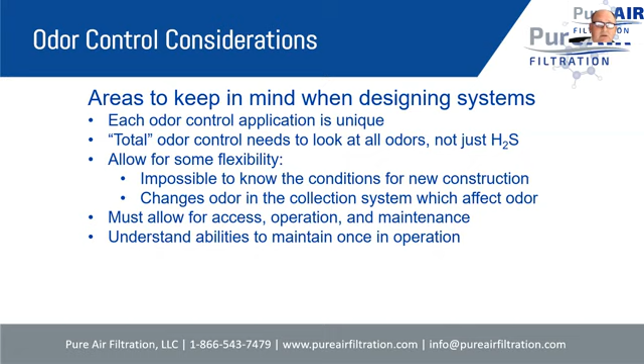So let's talk about the different types of odors. There's fresh sewage odor, basically referred to as fecal odor - that's sewage that's come just from the houses, and so it hasn't developed a whole lot of hydrogen sulfide. Of course there is hydrogen sulfide, which is the primary focus of the odor control industry. Without a doubt, 99% of what we're removing in most of our applications, we are focused on hydrogen sulfide.

Where there is wastewater odor, there is most likely hydrogen sulfide. So it's important, but also keep in mind mercaptans and other reduced sulfur compounds, ammonia and amines, and even volatile organic compounds can be a case as well. These reduced sulfur compounds can really be nasty odors at very, very low levels. We'll talk about that a little bit more, but it's important to make sure that you're addressing those as well.

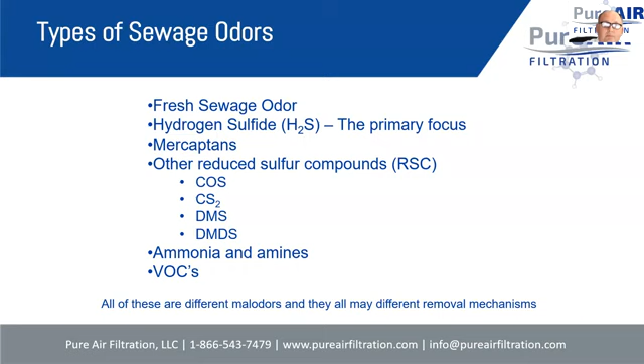If you're not familiar with a lot of odors, here is some description. This is some information that's commonly found on the internet about various types of odors.

I think everybody is generally familiar with hydrogen sulphide, kind of a rotten egg smell. The key is to look at the odor threshold for hydrogen sulphide. In this particular citing, it mentions 3 parts per billion as far as at what level you can smell it. That's a pretty low level, and that's why hydrogen sulphide gets focused on so much, because you can smell it very low.

But mercaptans are measured in the parts per trillion level. We've got plenty of others in the parts per billion and parts per trillion level. But if you take a look at ammonia, we're typically only smelling it in the parts per million level.

We get a lot of inquiries where people are looking to take odor out of a wastewater application, and they're concerned about hydrogen sulfide and ammonia. Generally, we don't see ammonia creating many odor issues, because you just don't smell it at fairly low levels. So you really have to understand what's the beast that you're working with and trying to tame that beast. Certainly some of these other odors are much harder to tame than others.

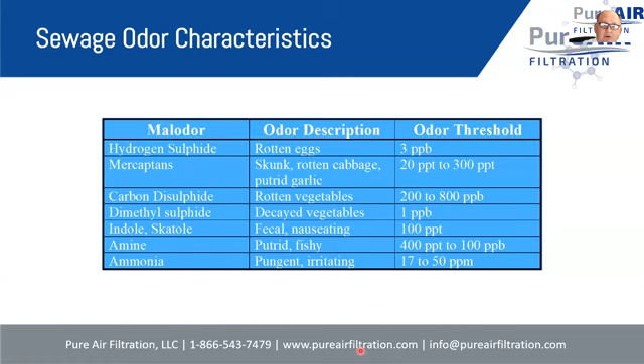So how do you go about figuring out what odors you have in your system? Let's say you're working on an existing application, you've got an odor problem, and you need to define what that problem is. There are some very good tools on the market readily available for you to work with. Many of these can be rented or purchased, and we'll discuss a couple of them.

Probably one of the biggest tools in the industry is the Odalog or Accrulog. The Odalog has been out for a number of years, certainly more than 15 years, and has been a standard in the industry for collecting hydrogen sulfide data. A very nice tool, but unfortunately it's gotten a little out of date as far as its capabilities. Along comes the Accrulog as a competitor, offering a really nice interface, Bluetooth connection, and even a cellular connection so you can check on your data remotely.

Very nice device. You can easily find these on the internet. They're distributed in the US by Detection Instruments, really good people, certainly would recommend. Both of these devices are distributed by Detection Instruments, but I definitely recommend looking at the Accrulog. It's a very nice product.

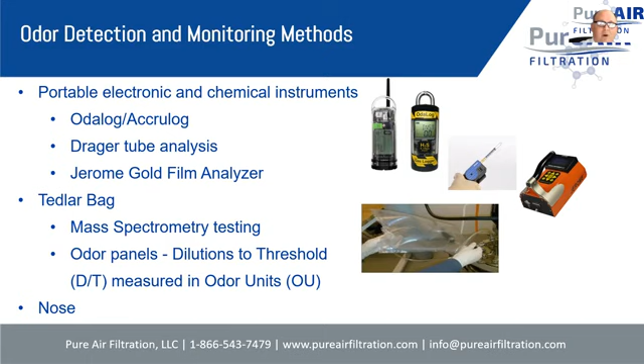So in summary, there are lots of different types of malodors, bad smelling odors, and the level and mix is constantly changing. So when you're selecting a system, you have to keep in mind that these malodors are detected at extremely low levels, in the ppb or parts per trillion levels. And different odors may need different types of treatment. Not every odor is the same, and you need to consider that when taking a look at the odors.

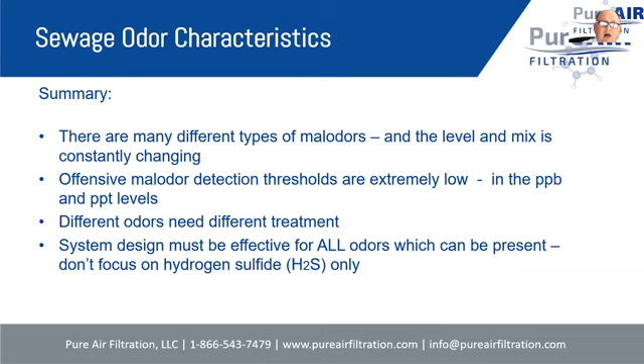And typically we recommend that you design your system to be effective at all odors which are present. Don't just focus on hydrogen sulfide. We've seen lots of cases where, as I mentioned before, hydrogen sulfide is the focus, and the system does a great job of removing hydrogen sulfide, but it leaves behind a lot of other odors which people are unhappy about.

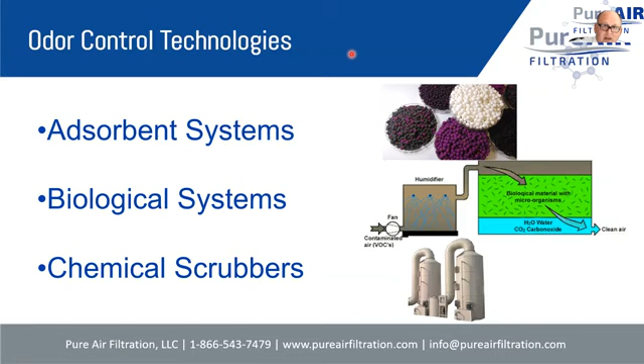So today we're going to take a look at odor control technologies. In general, we are going to focus on just 3 technologies. These are kind of 3 standard technologies used in the odor control market, especially wastewater odor control. So the first is adsorbent systems. The second is biological systems. And we're going to spend a short amount of time on chemical scrubbers. I'll be very frank with you, I am no expert on chemical scrubbers, so I don't offer a whole lot of expertise in that area, but there's a little bit of information in here that I can assist with.

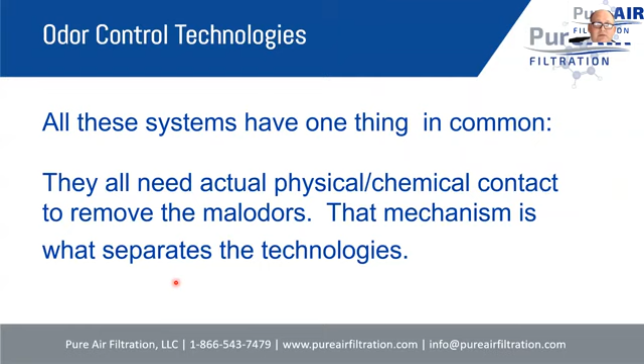So taking a look at those 3 technologies, what do they have in common? They have one thing in common: they all need some type of physical or chemical contact to remove the malodors. It's just the mechanism, the difference in mechanism that separates the technology. So they have to have some contact with the odor in order to remove it, to reduce it, to react with it, to eat it. Being able to understand the amount of contact and the type of contact that has to happen is very important when taking a look at these odor issues.

When you're taking a look at systems selection, the type of technology you're going to use, you definitely want to be interested in the efficiency of removal, the reliability of the system, initial cost, operating cost, footprint space, ancillary buildings if you need storage of chemicals. A big issue is maintenance and operational concerns, understanding the willingness of your client, how much time they're willing to spend with the system.

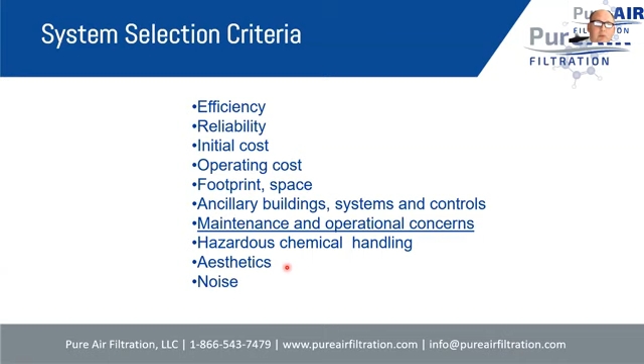Hazardous chemical handling is very important these days. Some of these systems can use very hazardous chemicals, so you want to make sure whether a client is ultra concerned about that. And of course, aesthetics and noise are big issues in the industry as well. There's no sense in fixing an odor problem and creating a noise problem for neighbors.

Here's a selection chart I've come across in taking a look at various odor control systems. This doesn't mention chemical scrubbing, and I'll probably work on adding some information about that. But this is a selection chart you can generally use based on hydrogen sulphide levels versus airflow. As your airflow goes up, various technologies become more significant, or as your H2S level or odor level in general goes up, other technologies tend to take over. In some cases, a hybrid technology might be used where two technologies together provide a solution.

We'll be able to send this presentation to you afterwards in case you want to reference this particular one. And when we update it to include chemical scrubbing, we'll send that to you as well.

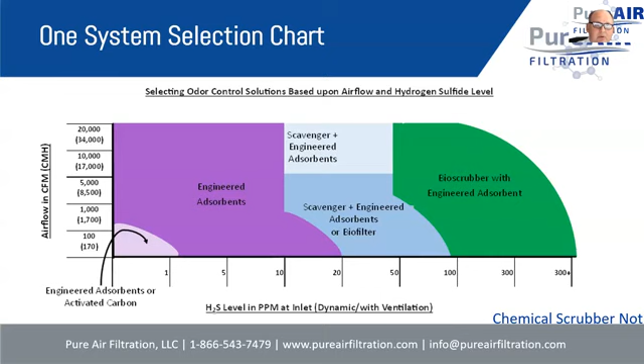So the first type of technology we're going to take a look at is adsorbent technologies. Very often this is referred to as activated carbon technology, and that's the basis behind the technology, but there are a lot of other adsorbents available on the market these days that go beyond activated carbon. So let's just take a look at activated carbon.

For activated carbon, sometimes people refer to it as charcoal - it's charcoal with an additional activation step. Generally, activated carbon has been used for a long time for capturing odor and purifying air. It's a good general odor capture, capturing lots of different types of odors. In general, it has a low capacity for inorganic odors, but it's great for organic odors - volatile organics it's really great at. But for inorganic odors without a carbon molecule, it doesn't do very well.

Keep in mind, activated carbon is made of carbon molecules, and carbon is attracted to carbon, so inorganic molecules that don't have carbon typically don't have a great affinity for activated carbon. Also keep in mind that activated carbon holding odor is actually a physical process. These odors go into activated carbon and are held inside, but they can actually be desorbed - so you can have odor come out of activated carbon. You need to be aware of that, be careful, especially when the activated carbon is near the end of its life, fully consumed, as it tends to let some of that odor out occasionally.

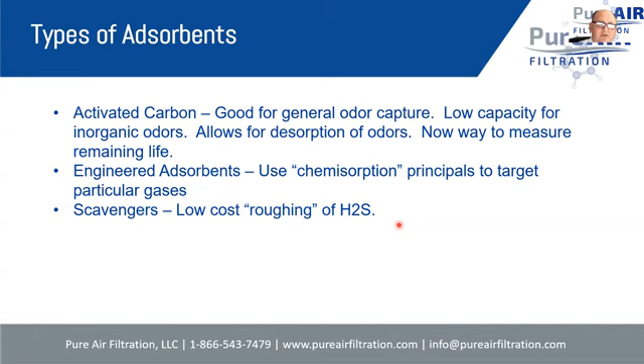Over time, engineered adsorbents have been developed. These are typically using a chemisorption principle to target particular gases - we're going to talk about chemisorption coming up. Engineered adsorbents basically take activated carbon and other substrates and beef them up, getting additional performance out of them. We'll also talk briefly about scavengers, which are low-cost roughing products focusing primarily on hydrogen sulphide. We'll look at an example of that as well.

The technology for adsorption is also referred to as gas phase adsorption. So how does gas phase adsorption work? These adsorbents, activated carbon being one of them, have a huge number of microscopic pores inside of them, typically just a little bit larger than the molecules being adsorbed. These odorous molecules find their way into the pores of an adsorbent and are trapped inside. In activated carbon specifically, there's a weak molecular attraction that holds those molecules in the adsorbent - it's kind of a magnetic principle.

If you think about it that way, it's a van der Waals effect, which is the technical term. Basically, molecules stick to molecules, and in this case odorous molecules go into the activated carbon and they stay in there in most cases. Sometimes they desorb. So that's generally how gas phase adsorption works.

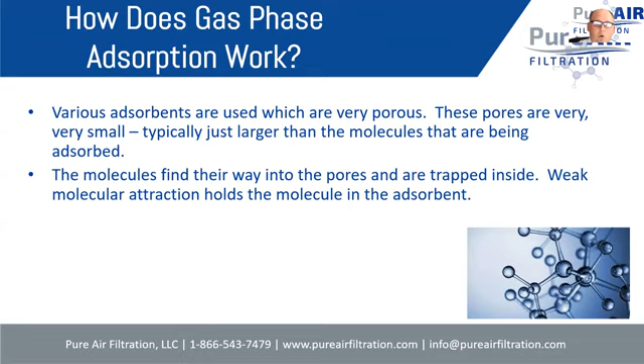Let's talk about the difference between adsorption and chemisorption. Adsorption is spelled with a D, and there's a difference between absorption and adsorption. Adsorption with a D is when something goes into an adsorbent and is captured on the inside.

It's very much a principle like a sponge. If you think of an adsorbent to be like a sponge, activated carbon is like a sponge for gases. If gases go into activated carbon, it's just like water going into a sponge. It's bound onto the inside and carried throughout that entire sponge. But like a sponge, if you squeeze it, the water comes back out. The same thing can happen with activated carbons.

Under the right conditions of stress, typically a change in temperature, pressure, or humidity, those gases can come back out. So that's the adsorption and desorption principle with plain activated carbon.

A subset of adsorption is referred to as chemisorption. Chemisorption is when the adsorption principle is used, but a chemical is added to the adsorbent. The gases go into the adsorbent, and then there's a chemical reaction that occurs while it's in there, and the gas is converted into a solid and held on the inside permanently. It would almost be like a sponge, but a sponge where you'd have a chemical reaction and the water couldn't come back out. That's the principle of chemisorption.

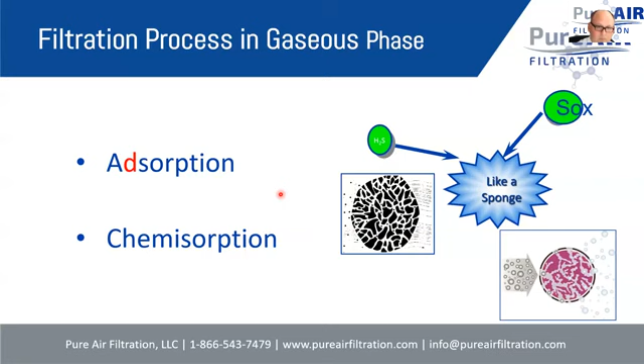So just to give you an idea about these pores I've been speaking about, here is a micro view of activated carbon. You can see under an electron microscope what these pores look like. These typically were originally the cell walls of some plant in prehistoric times, before it was turned into activated carbon, whether it comes from coal or whatever the substrate was ahead of time. Gases go into these pores and bind to the sides of them.

Now, the incredible story about activated carbon and why it works so well is that one gram of activated carbon has about 1,100 square meters of surface area. If you counted up the area of every one of these pores in one gram of activated carbon, you get about 1,100 square meters, about the size of a football field. So if you spread out activated carbon, you could spread it across a football field. It's an incredible amount of porosity, and we use that porosity as an advantage when working with adsorbents.

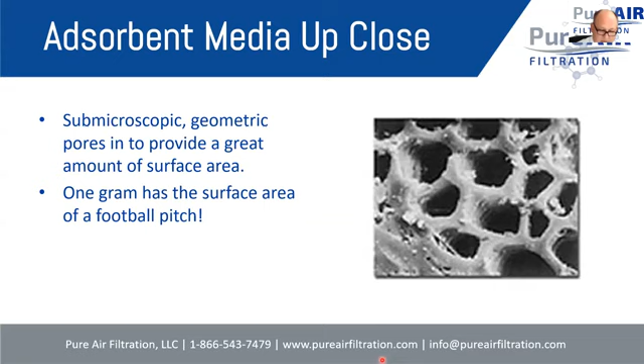So again, adsorption is a physical process. With activated carbon, it's typically reversible. Chemisorption is adsorption plus a chemical reaction, and typically you're working with impregnated carbons, catalytic carbons, or some other type of physical and chemical reaction.

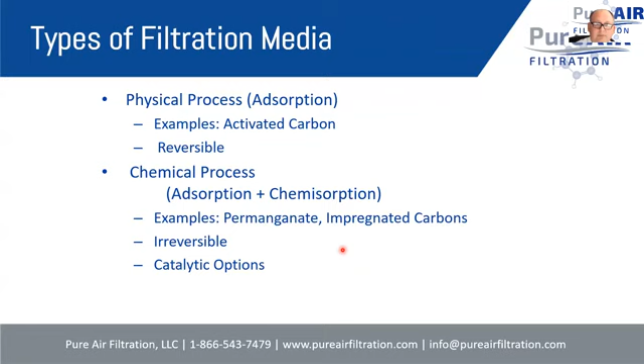Just some quick information on activated carbons. Keep in mind, activated carbon is carbon, and it can come in lots of different forms. You can have coal-based carbon, coconut shell carbon, nut shell carbon—lots and lots of different sources for the charcoal, which is the basis of activated carbon.

The key is that different types of activated carbon have different pore sizes, and different pore sizes are better or worse for capturing different molecules of different sizes. Very often in our industry, people focus on coconut shell activated carbon. There is a misnomer about it—it is one of the best activated carbons as far as capacity goes, but mainly for capture of volatile organic compounds. It really doesn't have any better capacity for inorganics such as hydrogen sulfide, but there's a misconception in our industry that coconut shell based activated carbon is the best activated carbon.

It is the best activated carbon, but only if you've got a VOC, a volatile organic compound, application. In general, just about all other plain activated carbons have about the same capacity as coconut shell activated carbon.

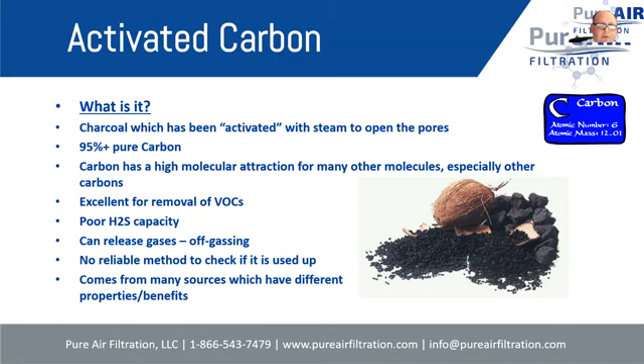Large molecules get caught in large spaces. Small molecules can feed down into these channels and get caught in small spaces. So that's why certain activated carbons work better for certain gases than others. An activated carbon with a high amount of microporosity is very good at capturing very small molecules, while one with larger porosity is better at capturing large molecules. That's the difference between activated carbons.

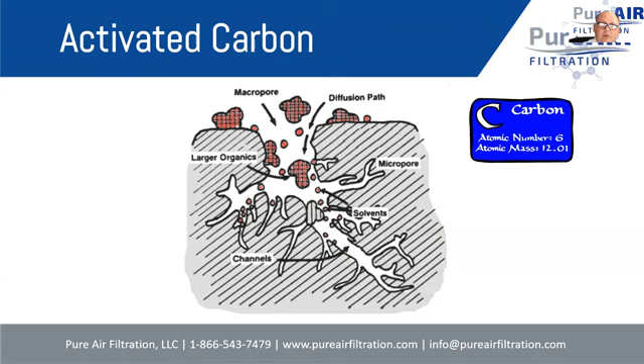We often get questions about carbon regeneration. If you're using activated carbon, and we do use some in certain applications, can that activated carbon be regenerated? The answer is yes, it can be. There are actually two types of regeneration of activated carbon which are possible. We'll address those briefly.

The first is kiln desorption regeneration. I mentioned that activated carbon has the ability to desorb the gases it's caught. If you take activated carbon and return it typically to an activated carbon manufacturer or a specialty regeneration site, they will run it through an oven that heats the carbon so much that all or most of the gases it collected will leave the carbon. Typically those gases are then burned in the furnace, and the activated carbon can be put back into use.

The difficulty is you have to actually remove the activated carbon, send it off to a site, have it regenerated, and then return it back to the site and refill it into the system. Generally, a lot of customers don't find that practical, and instead just dispose of the activated carbon and buy new activated carbon.

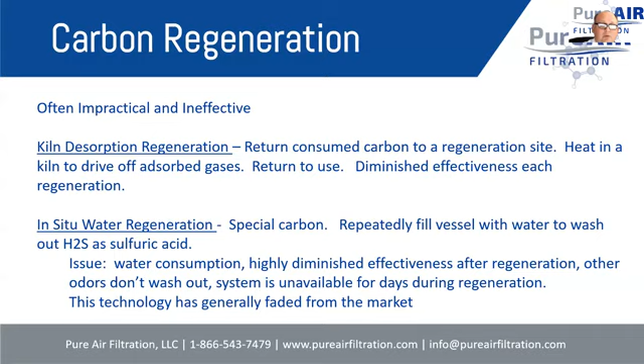So we'll talk about chemisorption. Now, chemisorption, as I mentioned before, is adsorption plus a chemical reaction. This is basically a process that is instantaneous and irreversible. These gases go into an adsorbent, go through a chemical reaction, and are converted to another molecule, typically a solid, where they're held permanently. So generally, after that reaction, the product is non-hazardous because you've taken a product like hydrogen sulphide and neutralized it, and it's typically pH neutral at that point.

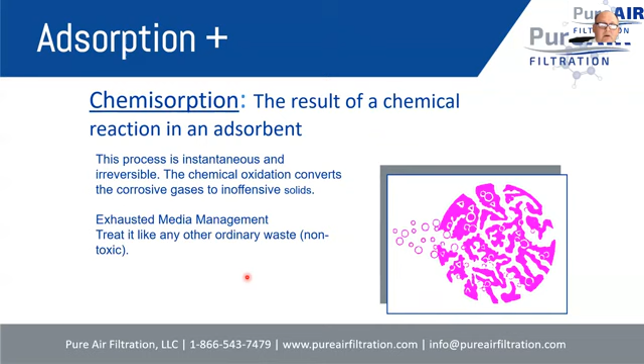Zeolites, natural zeolites, are just a very low cost porous product. There are a bunch of different types of zeolites, but most of the zeolite used is kind of a low porosity product for not very critical applications, typically maybe a commercial application for indoor air quality. And then there are some porous clays which are used as well, especially when it comes to scavengers.

So this is your substrate, your porous substrate, and then the chemicals that are added to do that chemical reaction, or the chemisorption reaction. There are various caustics. A very popular one is potassium hydroxide or sodium hydroxide - they're basically the same. That used to be a very, very popular product, but its popularity has diminished greatly because of an increased possibility of fire with the activated carbon.

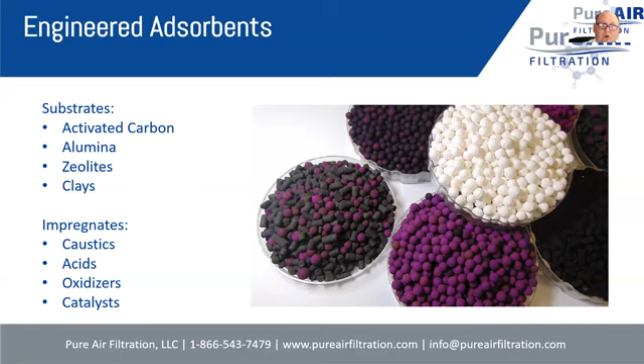We get a lot of questions from customers - well, if it's catalytic, why doesn't it work forever? We know that catalysts are not consumed during a reaction, so why don't these catalyst adsorbents have an infinite life? The reason is those pores fill up with the hydrogen sulfide, and eventually the hydrogen sulfide can't get into the activated carbon because the pores are so filled up with the sulfur, which is the end product. That's what diminishes the performance and the capacity. Once the activated carbon is full of sulfur, it can be disposed of.

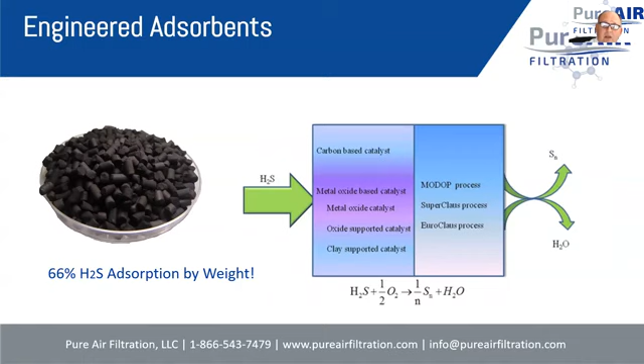The good thing about it is sulfur is non-hazardous. So typically the sulfur that's captured in the activated carbon can be disposed of without any concern for hazards.

I mentioned to you before, permanganate impregnated alumina, sometimes referred to as PIA. The material composition is activated alumina, impregnated with a permanganate, typically potassium permanganate. There are various concentrations offered in the market.

How does it work? It's a chemisorption, like I mentioned. It uses oxidation. The nice thing about this product is it's completely non-combustible. The alumina that is the basis of it is basically a ceramic. You could put a torch onto it and it might glow orange, but it's not going to catch on fire. So it's completely non-combustible, which is very nice for some applications.

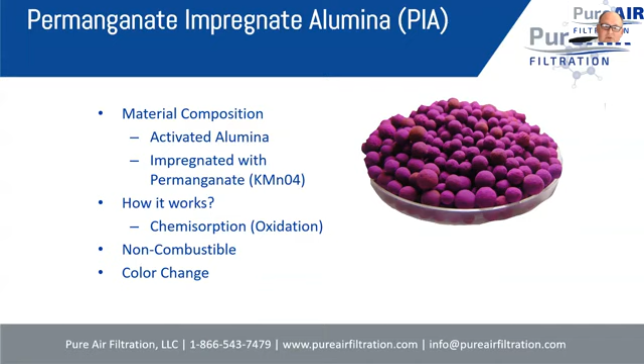And there's a color change that occurs. You can see a little bit of a color change here with some of the pellets, and that's simply due to being exposed to contaminants in the air, like sulfur dioxide or exhaust or anything to that extent. The product starts off with a nice purple color and eventually turns to a brownish color later on. So the color change is a nice ability.

The interesting part of this product is that by adding the alumina product to it, it is fire resistant, and it typically carries a UL fire rating, which is very important for a lot of cases. Certainly fire is something that needs to be avoided. There's also a low chance of off-gassing because you've got the chemisorbent involved, and you still get the color indicator. Even though the carbon doesn't have a color indicator, the permanganate media still has that color indicator.

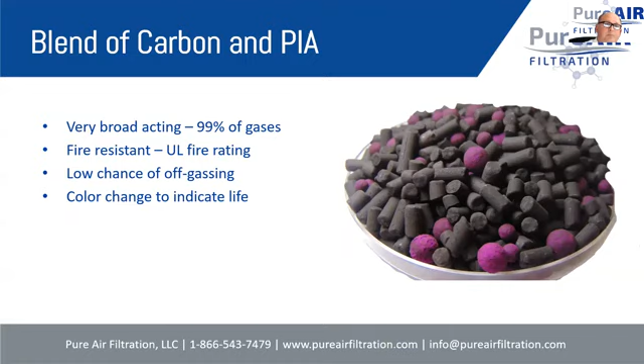That iron oxide has a high capacity for capturing specific gases, especially hydrogen sulphide. So this iron oxide will react with hydrogen sulphide. It's kind of a sacrificial product, we might say. You could use this to reduce high levels of hydrogen sulphide to lower levels. You'll very often see a product like this in an application where maybe you're starting off with 100 parts per million. You'll use this product because it's low in cost to reduce that odor level or hydrogen sulphide level from 100 down to 10, and then reduce the 10 down to 0 using some other type of adsorbent, which is more efficient than a scavenger like this.

So this is a very interesting product. The real attraction for this is that it's far lower in cost than, say, the catalytic activated carbons, while having a similar capacity. It's very attractive for applications where you've got higher levels of hydrogen sulphide. This would get changed out more often, but it's a lower cost product. So from the overall cost standpoint, it works well for high H2S applications.

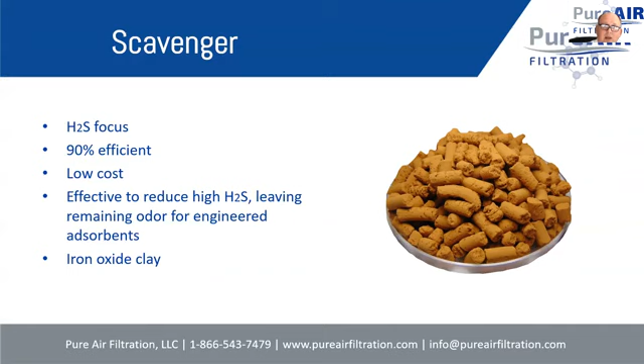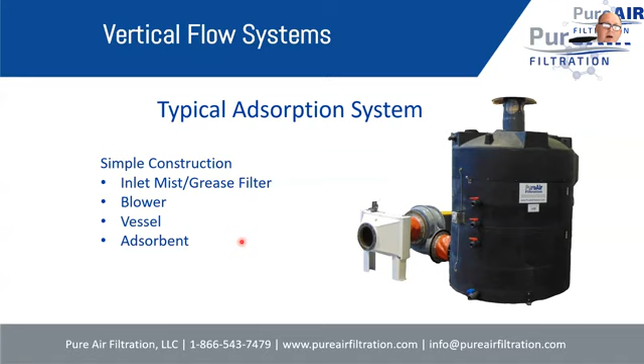This is typically what an adsorption system might look like. You're going to have a mist filter to make sure that none of the mist and grease and such enter into the adsorbent, a fan which is propelling the air through the adsorbent system, and then a vessel, kind of just a standard tank, which has an elevated bed inside of it. The adsorbents are filled on top, and the air basically percolates up through the adsorbent media and comes out the exhaust here. So very, very simple - inlet filter, blower, vessel, adsorbent - very low in maintenance.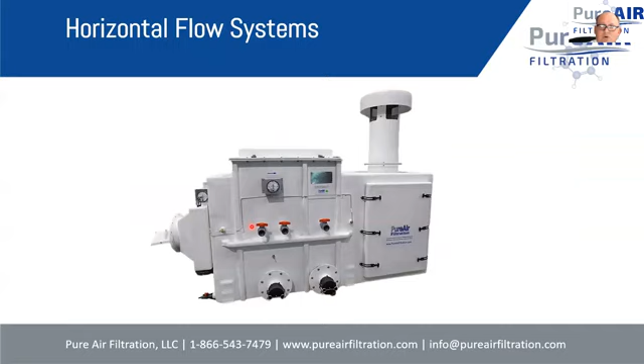Adsorbent systems can be small systems. They can be horizontal flow. You saw a vertical flow before. Here, this is a horizontal flow system. Here's the mist and grease filter we were talking about.

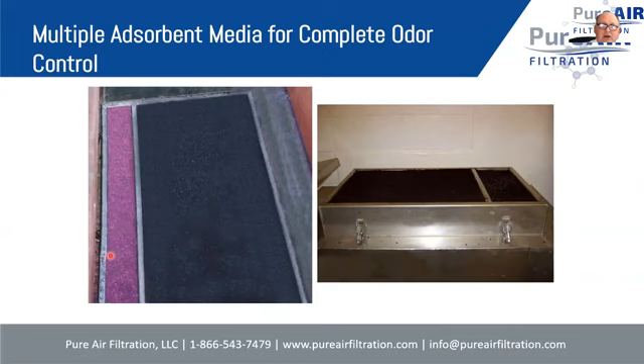The nice thing about adsorbent systems is you can use multiple adsorbents. We showed you that mixed adsorbent, which is one way of approaching it, but you can have separate beds of adsorbents. This is a horizontal flow system, so the air is flowing sideways horizontally here.

So maybe you would have two types of adsorbent. This one might be for capturing hydrogen sulfide. This one might be for capturing your reduced sulfur compounds. So you're able to have two different adsorbents in the system to capture all of your different odors in there.

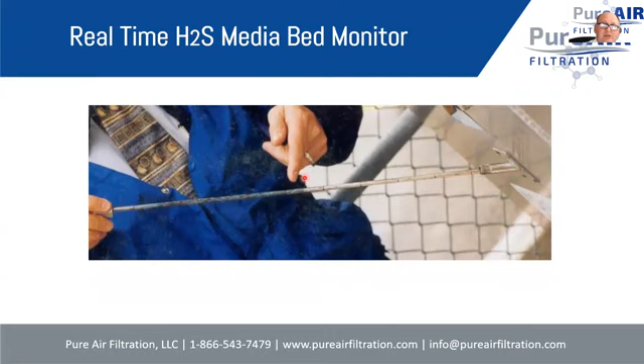Adsorbent systems, the chemisorbents, modern chemisorbents have the ability to actually monitor the consumption of the adsorbent bed. This is kind of a dipstick type device, which allows you to monitor how much of the adsorbent has been consumed.

There's also electronic versions of that adsorbent media monitoring as well too, where there's a probe that goes down through the adsorbent media. It measures the consumption of the adsorbent media and feeds that back to a computer system.

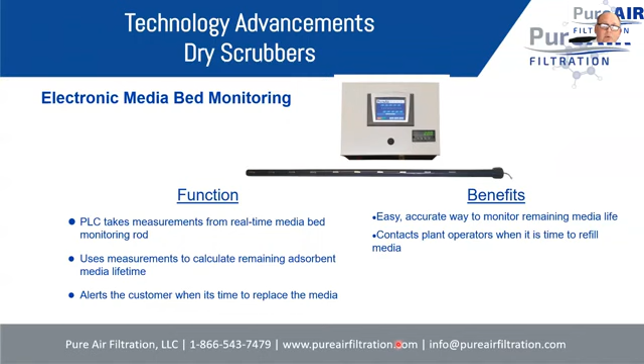So we spent a lot of time on adsorbents. That's certainly an area of primary focus for myself, but we also want to move into other technologies as well.

Biological odor control is certainly very, very popular and a very well established odor control technology throughout the world at the moment. I'm going to break the technology up into two different terms: biofilter versus bioscrubber or biotrickling filter.

There's a lot of disagreement in the industry about exactly what these devices are called and the difference between biofilters and bioscrubbers and biotrickling filters.

You'll find some people that basically say there are differences between these devices, but for our practical purposes, I'm going to define a biofilter as a system which is typically less sophisticated, less engineered. It's typically some type of box filled with a substrate.

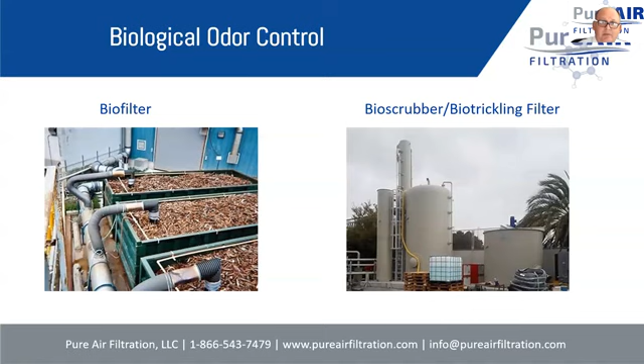This can be a system like we saw on the previous page, which looks like a dumpster, or it could be a poured concrete subgrade structure, depending on what you've got to work with. The air percolates up through this filter media, and the odor is captured here. There is going to be draining of liquid from the bottom from this humidified air, and that drains typically back into the humidifier or drains to be treated.

As this bacteria grows, it eats the hydrogen sulfide. There is a waste product from the bacteria, which ends up getting captured and then goes to drain from there as well.

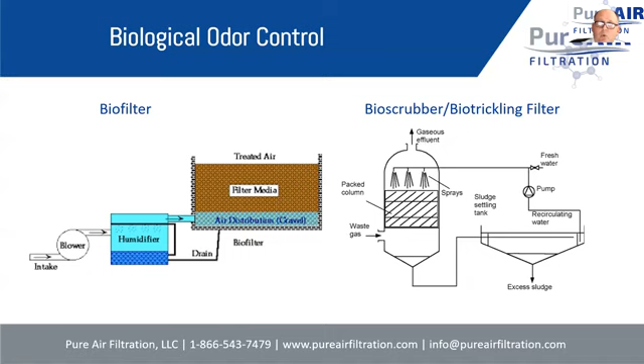Taking a look at a biofilter, it's very simple, low material cost, low maintenance and construction cost. It generally has fairly broad odor removal, certainly taking out hydrogen sulfide, but there are other bacteria that can grow in there to focus on other odors as well. It's typically good for low odor levels.

Typically, we're not looking at a biofilter for high odor levels. Typically, residence time for a biofilter is about 30 seconds. A general rule of thumb for a biofilter is that you need to have the air inside of that mass for about 30 seconds.

A bioscrubber or biotrickling filter is very often hydrogen sulfide focused. They're really excellent for applications where you've got high hydrogen sulfide applications. You can have recirculation or once-through applications. Typically the recirculation systems are focused specifically on having really high performance at removing hydrogen sulfide, because the recirculation allows you to have the optimal conditions for the type of bugs that like hydrogen sulfide.

A once-through system will also take out hydrogen sulfide, typically not at the efficiency of a recirculation system, but it can also grow additional bacteria which might remove some of your other compounds too. Certainly more complex, there are pumps and pH indicator meters and things on there, so they're more complex than a biofilter for sure.

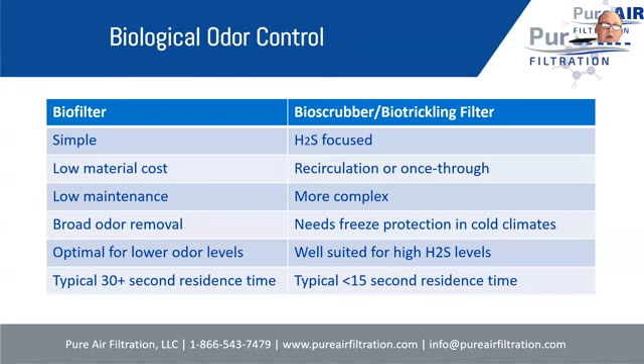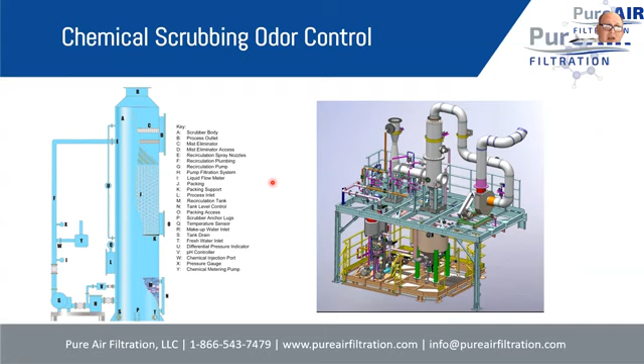So let's talk about chemical scrubbing. Again, I mentioned in the beginning that I'm certainly not an expert in this area. I did consult with a friend or two in the industry to discuss chemical scrubbing and get some information here.

The key with chemical scrubbing is it can be fairly complex. Here are some examples of these chemical scrubbers. This actually looks a lot like a biological scrubber, and generally they're set up very similarly—it's just that there's a chemical reaction occurring instead of a biological process. In general, odors or gases are passed up through a column where there's a spray and a packing. Similarly, you need surface area for the reaction to occur.

The key here with chemical scrubbing is the chemical use. Chemical scrubbing was much more popular in the past, but the chemicals used in chemical scrubbing are typically very concerning from a safety standpoint. In general, the liability of having those chemicals available, and all the ancillary necessities of dealing with those hazardous chemicals, make these less attractive. Certainly in many applications, it still makes sense.

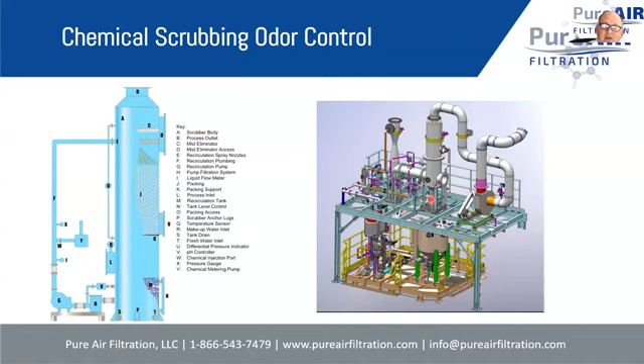So here's a wet scrubber, typically used in an industrial process—you can see they can be very complex. They're very good for constant flows. In general, my contact in the wet scrubber industry says that if you're looking at 20 to 100 parts per million for hydrogen sulfide, they are good, with an airflow typically of 10,000 to 50,000 CFM. So wet scrubbers or chemical scrubbers are typically looking for higher airflows, where it makes sense for higher airflows, and typically for higher gas concentrations as well.

Taking a look at this, chemical scrubbing is typically focused on one gas. You can have multiple gas systems, but it's basically multiple sections or multiple towers of different chemicals, because if you have multiple gases you're focused on, you have to have multiple reacting chemicals, and they typically can't be mixed.

These systems have high concentrations of these reactive hazardous liquids, so maintenance is very significant. These hazardous chemicals are tough on pumps and sensors, so maintenance can be very significant for a chemical scrubber. They also have to be designed at the maximum gas level, because the reaction has to be set to work at your maximum gas level. So if you have a fluctuating odor or gas level, the system has to be designed at whatever your peak is, whereas some other technologies, like adsorbent technologies, are designed for your average gas level.

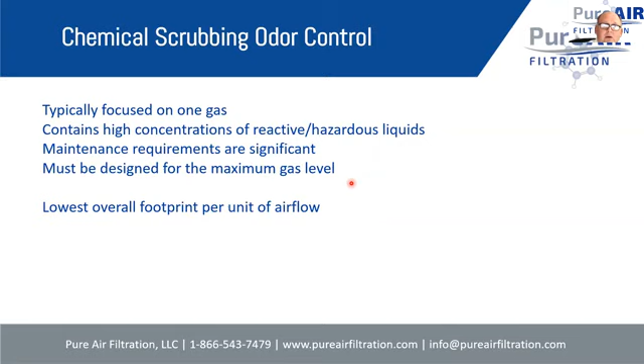Wet scrubbers or chemical scrubbers have to be designed for your max gas level. In general, though, they have the lowest overall footprint per unit of airflow, so you can get really high airflow through these systems in a low footprint with a chemical scrubber.

Coming near our end, we've got just a few more slides. So there's a little comparison of technology. We'll forward this to you to take a look, but we've basically broken it up into activated carbon.

Advantages are low maintenance and high efficiency. Disadvantages are the periodic replacement which is required, and generally low capacity for hydrogen sulfide. Engineered adsorbents kind of take a step beyond activated carbon.

They're low maintenance as well, high efficiency, lots of different configurations. You can have multiple adsorbent medias and multiple flow directions and such. The disadvantage is it does require periodic replacement, typically less than activated carbon, but it does require periodic replacement of the adsorbent.

A biofilter generally has no hazardous chemicals involved, so that's very nice. It's typically a low maintenance system. When it does require maintenance, it requires a lot of maintenance, getting in and changing out the biomass that's there, and that's not a great job, but typically that's only occurring every 3 to 7 years is kind of the number I hear with that.

So that works fairly well. Generally, they have a very large footprint though, so you're not going to see many biofilters in urban areas where land is a resource. These are going to be typically farther out away from urban areas.

A bioscrubber doesn't have any hazardous chemicals. It's very often considered a green technology. It's especially considered effective on hydrogen sulfide. There are lots of other possibilities for it, but generally it focuses on hydrogen sulfide.

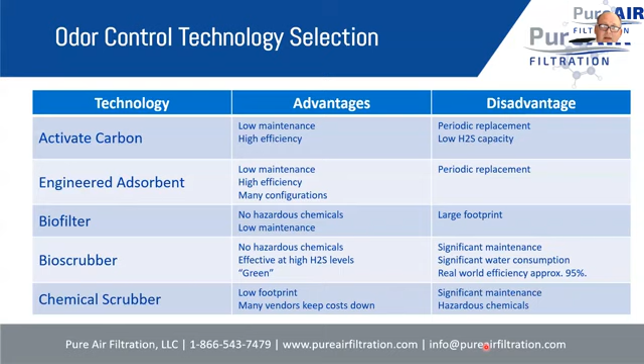Chemical scrubbers have a low footprint. Lots of vendors out there for them, very much available all over. It's typically fairly easy to design these. The companies that sell the packing towers offer lots of great support with these chemical systems. The biggest concern is the significant maintenance and the hazardous chemicals involved with it.

So I guess in conclusion, total odor control is possible. You've got to be careful about your selection of odor control. It requires certainly some knowledge or assumption of the conditions that the system's going to see.

I would say one of the most interesting solutions out there is the hybrid technologies that are offered, where, for instance, you use a bioscrubber to greatly reduce your hydrogen sulfide level, and then you use an engineered adsorbent system afterwards to capture any remaining odor with this. So these are very, very successful, and customers really like having this hybrid technology working together.

Same with the hybrid technology of scavengers followed by an engineered adsorbent media. So I mentioned that you can have a system which focuses on high hydrogen sulfide levels, uses a low-cost scavenger to reduce that hydrogen sulfide level. It won't completely eliminate the hydrogen sulfide or the other odors that might exist, and then you follow that by an engineered adsorbent, which is focused on really high efficiency and broad odor removal as well.